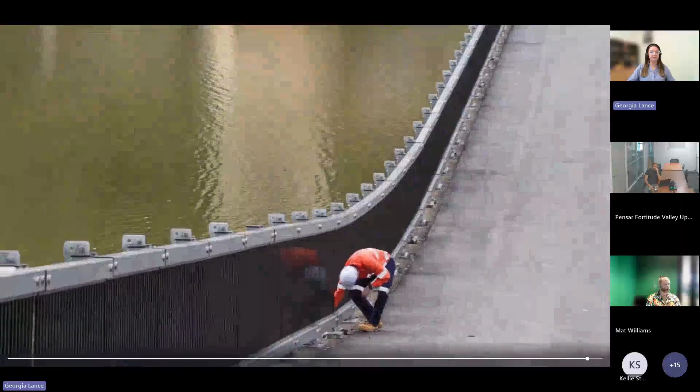Today, we're going to explore how the heritage-listed Mt Crosby Weir Bridge was transformed from a decommissioned single-lane road bridge into a flood-resilient pedestrian pathway, featuring a new, innovative, collapsible, fibre-reinforced polymer handrail system.

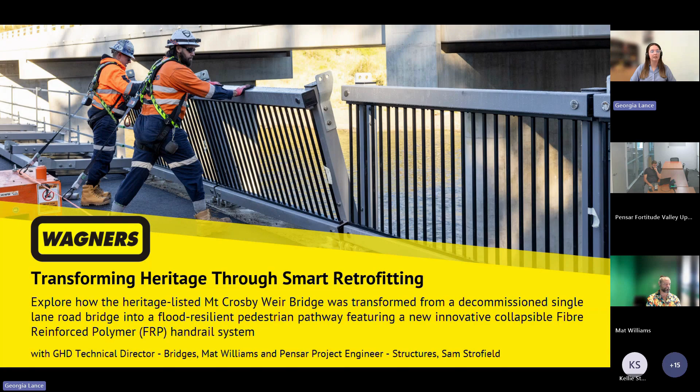Mat is a bridge engineer with over 20 years' experience designing road, rail, and pedestrian bridges across Australia and New Zealand. As a technical director in GHD's Bridges team, Mat is interested in extending the life of existing infrastructure through strengthening and repurposing solutions. Over the past decade, Mat has played key roles in various Mt Crosby Weir Bridge projects. His involvement has included structural assessments of the existing Weir Bridge, concept designs for widening and strengthening, design and construction phase support for the downstream duplication bridge, and most recently, the design of modifications to repurpose the existing bridge as a pedestrian crossing.

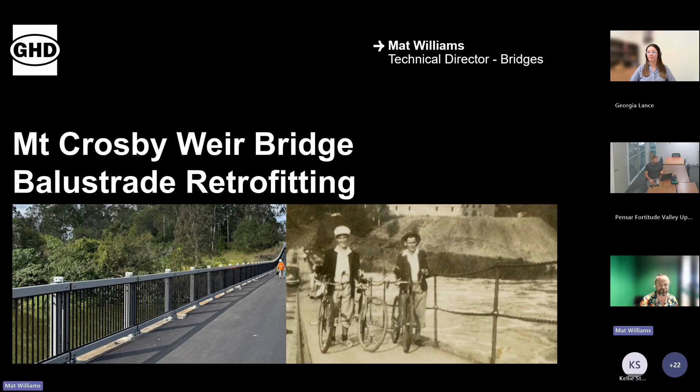So it's fantastic to see, like, this bridge is 100 years old. It's at the end of its usable life as a road bridge, and the road bridge wasn't even its original use. So it's fantastic to see it getting repurposed and able to be used for pedestrians and cyclists for who knows how much longer.

So before we get started, there's a little location of where the bridge actually is. It's on the pin on the bottom left there. It's actually quite close to Ipswich. It's on the Brisbane River. You can follow it winding all the way from the mouth up to near Ipswich there, but it's downstream from Wivenhoe and Somerset, so it's still subject to all the same floodwaters.

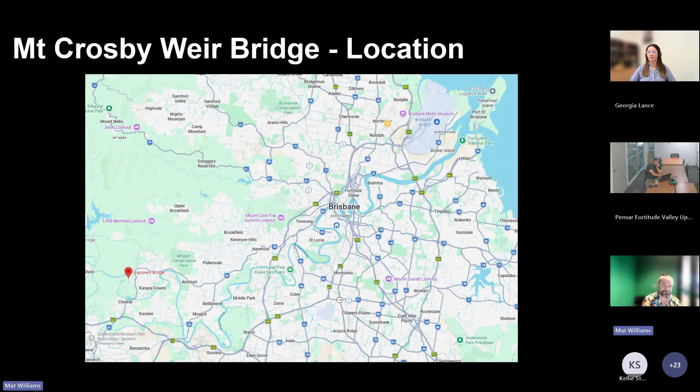The volume of water comes through there that we've all seen on the news many times, inundating Brisbane. So this is actually the furthest upstream tidal zone of the Brisbane River. Not that that's particularly useful, it's just an interesting little tidbit for us.

Start our little trip back through time. The first crossing I'm aware of at this site is back in 1884, approximately. I had to do a bit of guesswork with some of the numbers. It would have been built at the same time as the East Bank pumping station you can see in the background of this photo. So that in itself is a fascinating building. I think a few years ago they even opened it up for Brisbane Open House. It's worth it if you're a bit interested in some of that older infrastructure.

But this bridge is an old timber bridge. I think it lasted about 9 years before the first flood came through and completely wiped out this crossing. In the next few slides I go through, you'll just see a trend. I'm just trying to demonstrate how much water comes through the Brisbane River that any infrastructure built in the river here has to actually deal with.

So that bridge was wiped out in the early 1900s. A replacement was built. This is a more robust construction. I think this one holds the title of the only previous bridge that hasn't had significant damage from floodwater. This one was only replaced when the weir was upgraded upstream of it.

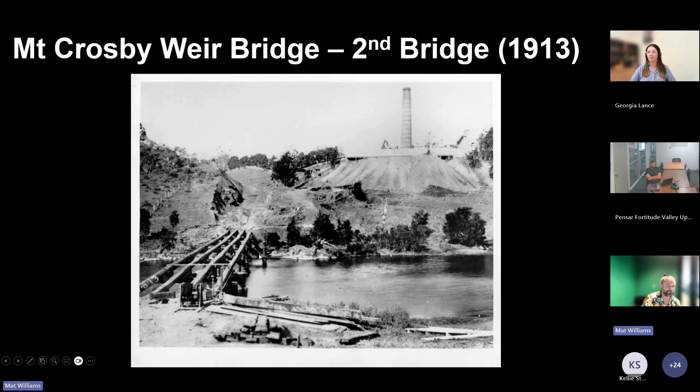The foundations for this bridge, the remnants of that are still visible today underneath the new road bridge duplication that we completed a few years ago. In fact, a lot of that bridge was set out to miss these heritage listed foundations in the base there. So this second bridge lasted up until the weir was upgraded.

So this is starting to look quite similar to what you'd see on site there today. This is 100 years ago, 1926. In the top left photo there, you can see that second bridge still spanning the river downstream while the new one is being built. The new bridge there, the weir was getting built. The bridge is an integral part of the weir. It lasted approximately 1 year till the first big flood came through.

So that photo in the bottom right, I believe, is from 1927, 1 year after the bridge was complete, where the full western approach was washed out. So again, just an opportunity for another fun photo, but it's just trying to demonstrate how much water comes through here. One of the other key things worth pointing out here is you can see our friends standing on the tram tracks that are still spanning where the approach used to be.

The fact that this bridge was designed to carry a tram as its primary purpose is actually quite relevant to even the design of the balustrades we put in today. I'll touch on that a little bit later, but just remember that that's a key thing, that this bridge was originally designed to carry trams backwards and forwards along the weir to aid construction, but also to supply coal to that pump station on the east bank.

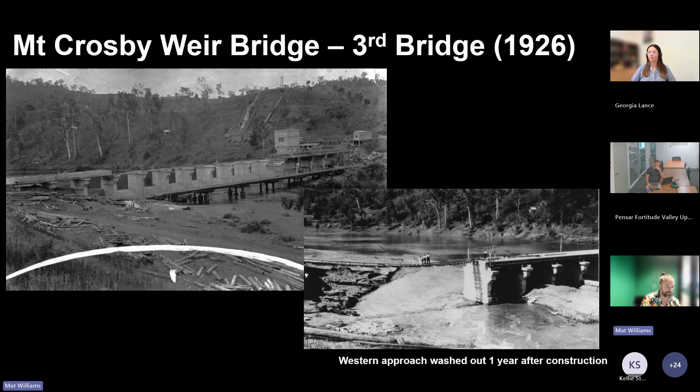Okay, so I believe it was only a year later they lengthened the bridge, so built 1926, half wiped out 1927, lengthened in 1928, and that's largely how the structure is still there today, with a few strengthenings and updates along the way. The photo on the right-hand side there is from 1984, shows the bridge lengthened. You can see the original abutment location downstream from it.

This is an interesting photo because it's while they were building a new pipeline across the river, they fully dewatered the Brisbane River downstream of the weir here to be able to build that pipeline. But it's a unique opportunity to get an appreciation for how much water comes through here. I think you can see one person, and that pipe is almost 2 meters in diameter, to get an idea of the size. You can see the height of those piers, how much water comes over that weir. The lengthened bridge is almost 150 meters long. So just trying to emphasize how much water comes flying down the river here.

Left-hand side is just that same photo from 1940. I believe the tram was already disused at this point, but those tram tracks are still embedded in the deck there today. I like that photo because it shows it spanning a few ranges, got the vehicles driving on the bridge, but also got pedestrians and our cyclist friends using it in the 1940s like they will be today.

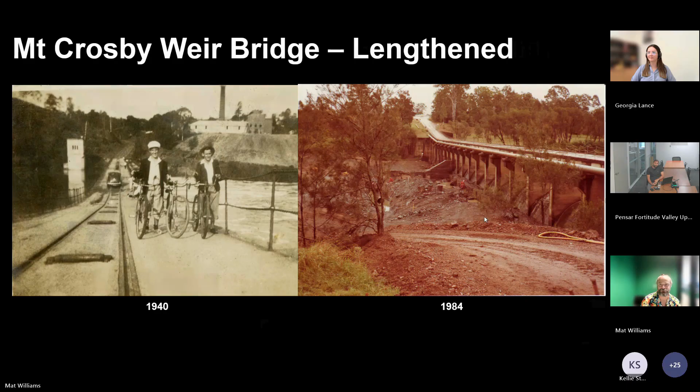So we saw before how tall this weir is above the actual riverbed. But when this flood water came through, the debris up the bank there shows just how high that flood water was coming up the bank. I know I'm harping on this point, but it's not just an academic exercise of what water might come through here. This bridge gets inundated frequently and it comes through quite quickly as well.

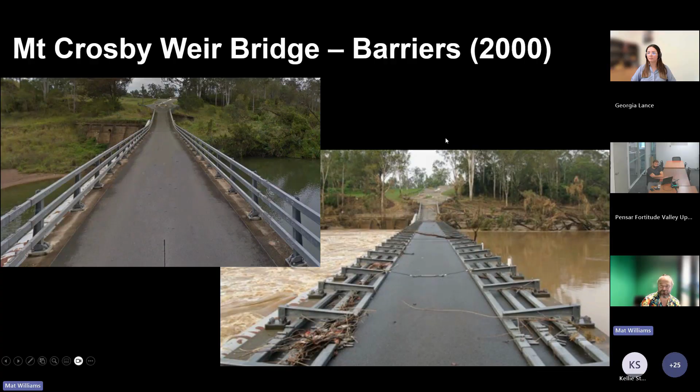So the next photo is actually one of the few photos I have available of the bridge actually in flood. I don't think this is anywhere near as high as it's been, as we saw from those debris photos before. I think this is probably just the highest where someone was going to actually get near the bridge and take a photo, because the floodwater continues to rise quite quickly from this point in one of the flood events.

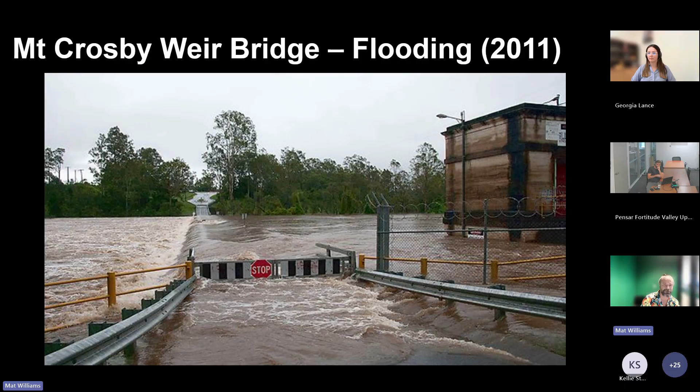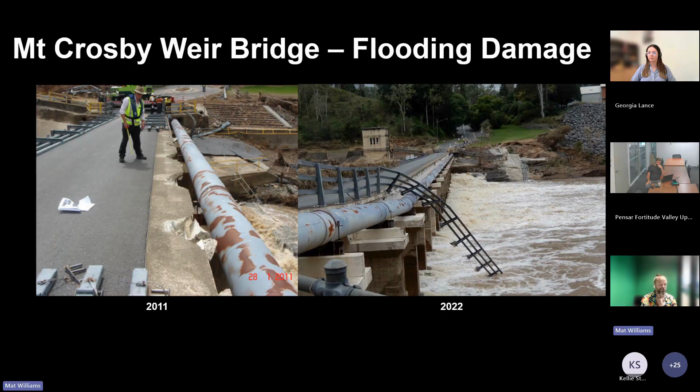There's beams on the edge, which are well reinforced as well and provide resistance, but the bridge deck in between these beams is largely nominally reinforced. The bridge was designed to carry the tram traffic. Apart from that, it would be foot traffic or very small vehicles, horse and cart sort of things, probably at the time. So there's a fairly nominal mesh in the bottom. Apart from that, the bridge deck is largely unreinforced.

So it's not surprising under the huge flood forces. I don't think I mentioned, but at the peak of the flood event it can be up to about 5 metres per second coming through here. A lot of water moving very fast with a lot of debris from upstream. So it's not surprising it'll just tear the concrete off an unreinforced piece of concrete on the side.

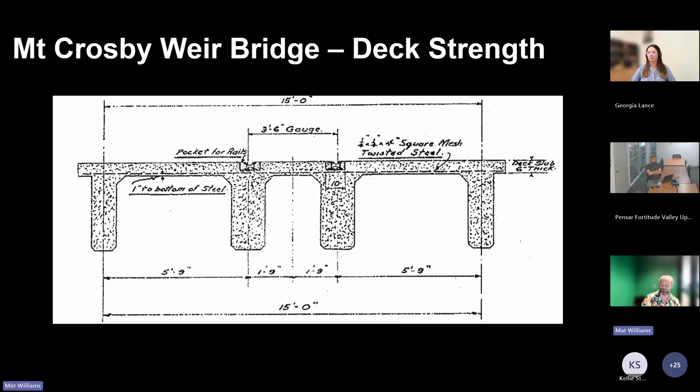So the traffic rail system that was there until recently, that was damaged in a few of those flood events. And another key point is each of those segments weighed approximately, I think it was about 700 kilos from memory. Whatever the number was, it was far too heavy to be folded down by hand. This required lifting equipment or forklifts on the bridge to actually fold it down.

Before we built the duplication, this was the highest bridge for this local area. So it was always left open as long as possible to give safe access to residents. So it was always a race against the clock to come and fold these barriers down. And you needed lifting equipment that was slow and heavy to actually fold down the length of the bridge. So Seqwater were again very keen to see a much lighter weight system when they actually replaced these.

Just after discussing some of the constraints at the site, after the new bridge was built in 2023, Seqwater engaged us again to design the retrofitting for this bridge, a new balustrade system. I'll go back to that previous photo. We considered quite a few options of how to do this. One of them was just, can we accept what's there? The short answer was no. As it is, it's just not suitable to use as a balustrade. Big gaps between the traffic rails. You can't use that as a balustrade system. A child could just crawl directly underneath those barriers, and various other issues as well.

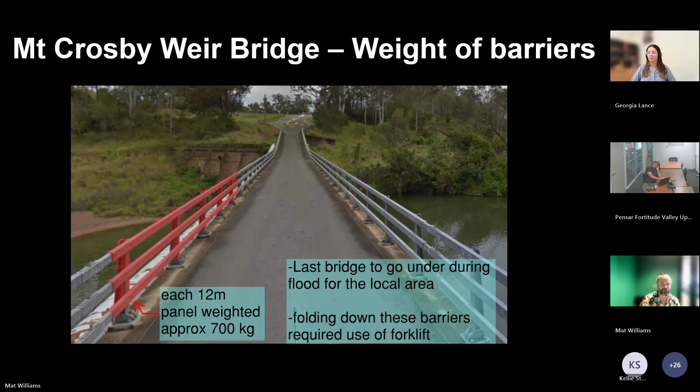So we considered, can we use what's already there and attach additional elements to it to make it a suitable barrier? The weight was still quite a big issue of these systems, so anything we added to it was just going to make the weight of folding this down even more of an issue. So we went through those few options. We looked at, okay, well, let's replace it with a new folding balustrade system that's more of a breakaway system with a fuse bolt.

We looked at that, but that was quickly dismissed because the bolt needs to be significantly stronger than the pedestrian loading on the balustrade to make sure there's no chance that breaks under normal use. But then it needs to break well and truly before the bridge deck or the balustrade post reaches capacity. And the reality from what I showed before with that really lightly reinforced deck, there's just not enough difference between those capacities. The fuse system couldn't work and couldn't guarantee it would break before the actual bridge deck gave way. So we couldn't progress with a breakaway fuse system.

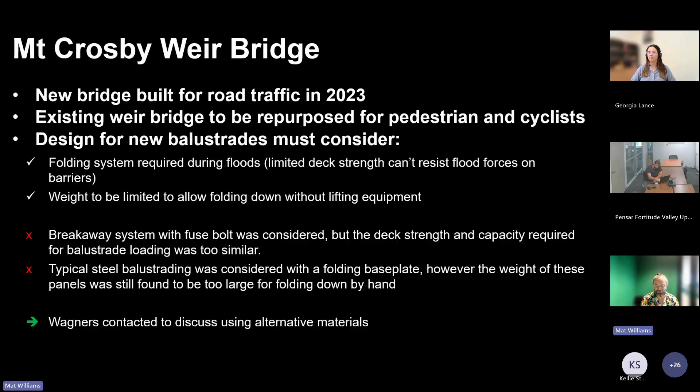And then we also had a look at replacing it with a lighter weight but sort of typical steel balustrading approach, but went through a few iterations with that, and we still found it to be too heavy to be something that could safely just be folded down by hand. So at this stage of the options development, this is when we first contacted Wagners, knowing that they had a lot of experience with lightweight structures and barrier systems in this area. So in the first contact with them, we described what the problem was, and they were confident that they'd be able to work with us to develop the system.

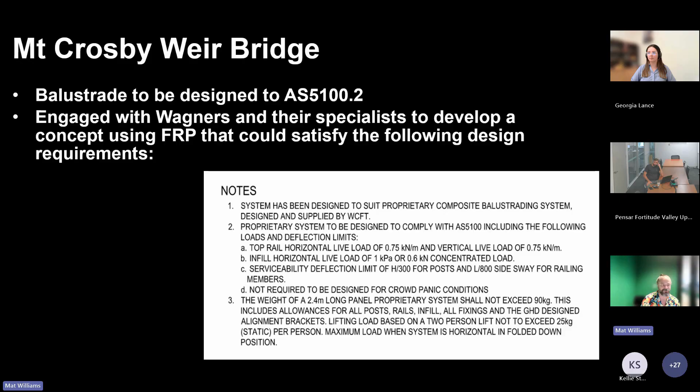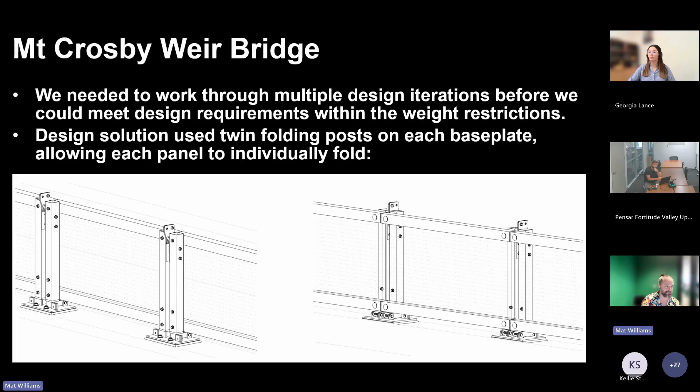The back of that alignment bracket at the top there also has some holes where we attach the actual restraint. So when it's folded down, they're tied down together and can't be lifted up during the flood water. And so this design concept is largely what was actually fully designed and built.

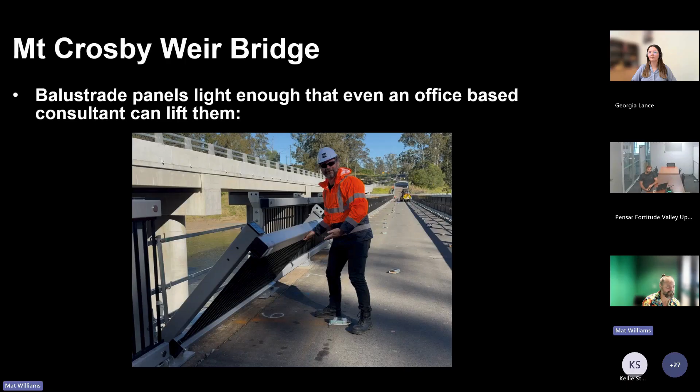It has a simple hinge arrangement with a bolting attachment and a stub post that sits up a few hundred millimeters that's actually used as the interface between the galvanized steel components and the Wagner-supplied FRP above. So I'll hand over to Sam now just to have a bit of a discussion about some of the construction considerations.

The process itself is pretty straightforward. We removed the bolt connecting the bottom rail to the vertical member, which was in that first photo, Matt, when I started talking. You can see that bottom bolt that's running through the stub into the vertical member. Then we slid the CFT system over the stub and then reconnected that bolt back in place, and that was it.

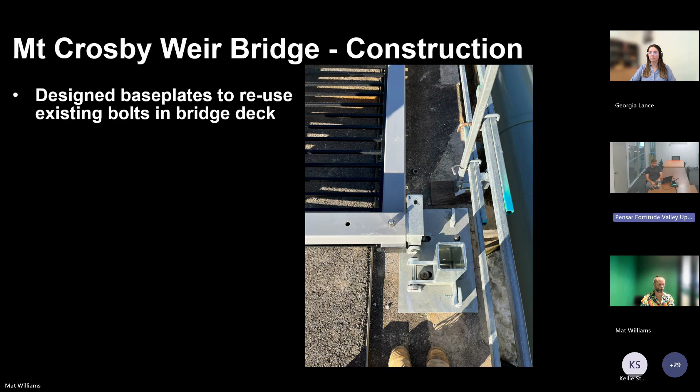Again, thanks to the planning and drawing views and survey verification, and with Matt heavily involved throughout, every panel fit perfectly, as intended. Once all the panels are in, we attached all the alignment brackets. We obviously grouted, placed locking pins, and essentially that was the installation process throughout the full length of the structure.

Yeah, like I said, everything went perfectly. The planning from Wagner's, from GHD, and I'd like to say from us too, really did pay off. So with that, Matt, I'll hand it back to you, mate, and you can continue on.

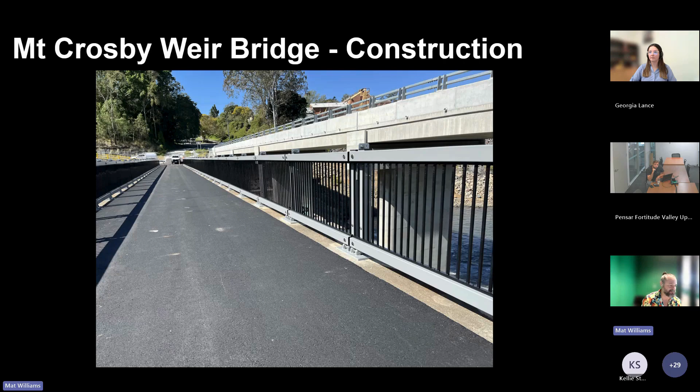For these individual panels, there's one tie down for each pair of panels. So when they're folded down, there's a lot more restraint per area of balustrade. But also because they're broken into separate panels, if there did happen to be damage or one of these ties wasn't installed correctly for any reason, if something lifted up and was damaged, it should be quite isolated for a repair, as opposed to one of those photos I shared earlier where it was like a zipper pulling off concrete the full length of the bridge.

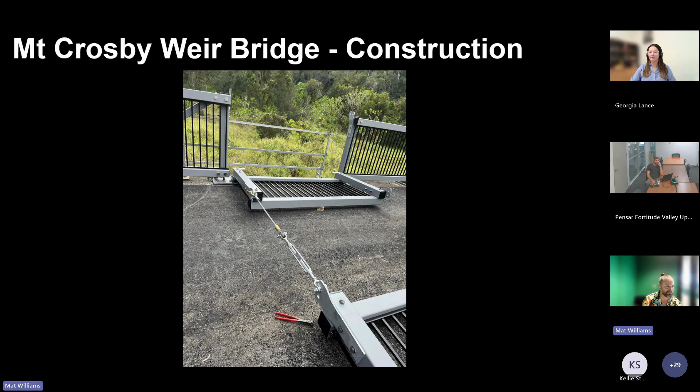But yeah, I think that's everything I hoped to share with this one, but I'll pass back to Georgia so we can go into the Q&A session. Beautiful. Thanks so much, Matt and Sam. Thank you very much for your presentation. That was fascinating to travel through time with you guys to see where that bridge started back in 1884 and to now see the innovative FRP collapsible handrail concept that's in place now. So thank you very much.

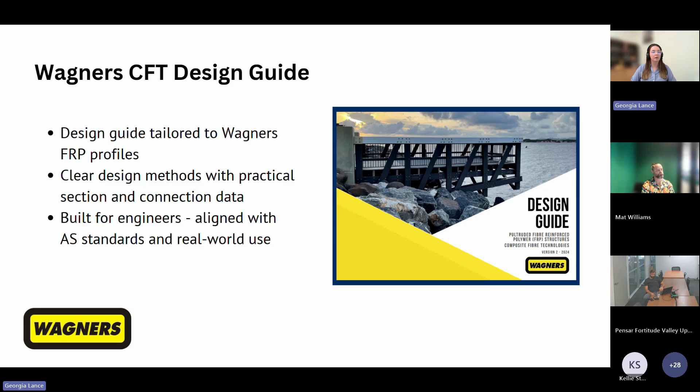When we talk about manufacturing versus fabrication in the context of FRP profiles, it's more than just industry jargon. The distinction really matters, especially to engineers. Manufacturing is where the product is made. It starts with raw materials where fibres and resins are selected, combined and shaped through processes like pultrusion to produce standardised FRP profiles. This is where material science, chemistry and quality control come together to lock in the fundamental strength, durability and performance of the product.

By contrast, fabrication happens after manufacturing. It's the process of taking those manufactured FRP profiles and cutting, joining, and assembling them into structures such as bridges and boardwalks. Fabrication requires precision and engineering skill, but it does not change the inherent quality of the FRP material itself. The difference matters because you can't improve weak materials through fabrication alone. A structure built from poorly manufactured, imported FRP will never perform as expected, no matter how well it's fabricated.

So when specifying or procuring FRP, engineers need to ask, were the profiles manufactured here to recognised standards or just fabricated locally from imported components? That clarity ensures performance, compliance, and long-term value.

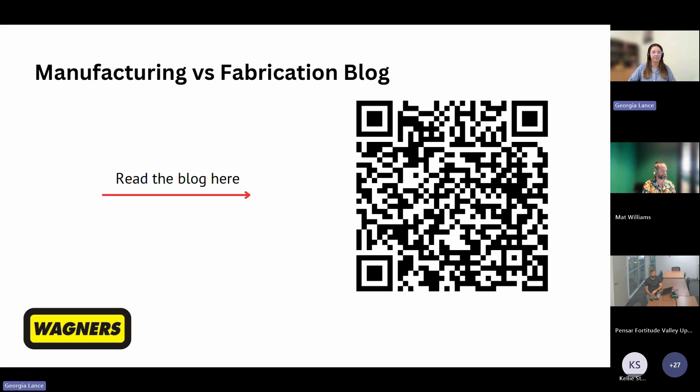How did you factor in the debris mat into your design? Was there anything factored, or was the assumption that it would always be collapsed? It definitely was always assumed to be collapsed. So whether you call it a luxury or not, in this case, we'd seen what happened if the barrier was left up. This has never been designed to stand up and resist those flood forces. No matter what we do, unless we go through and replace this weir, it's going to have the same effect, the same result if it's not down and tied down.

In terms of actually designing for the debris mat, we did do some numbers on the folded down state, what sort of forces we're expecting in that tie down system. Now, all the calcs we did actually showed that it worked extremely easily. When in the folded down state, the force that we could get on those straps to restrain it, it seemed like we could get away with something a lot smaller or spaced further apart.

But again, we can't ignore that in 2011, one tied down with a steel bar spanning 12-metre length, that the calcs say shouldn't have been a problem, failed. It may have been taken out by a log or something, but it has failed. So when it came to the restraint system, robustness was key. We did some calcs, but it was sized up from there from practical experience, trying to avoid that same damage happening in the future. So it's a very roundabout way of saying it was governed by other things.